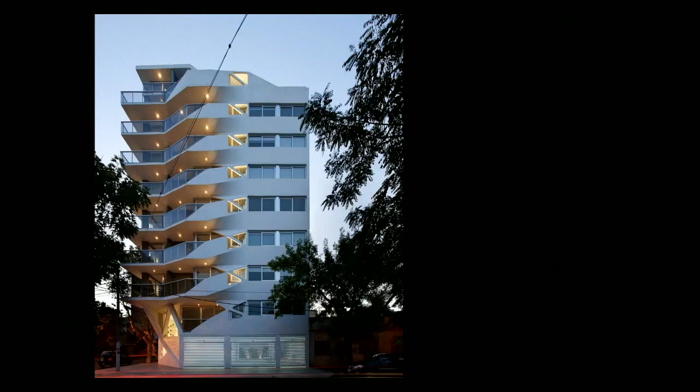Patterns for us has always been an inspiration, as it represents material form and geometry, but also social habits and human behavior. We always seek to integrate these ideas by turning everything that seems to be intangible qualities of life into somewhat of a physical presence.

We always wanted to work globally, to engage and learn from very different cultures, and after approximately 20 years of doing this, we have ended up building projects in different parts of the world. Probably, I don't know, maybe you might have seen a few of them.

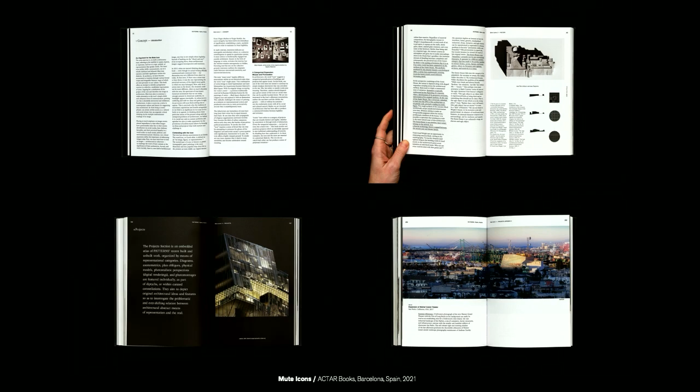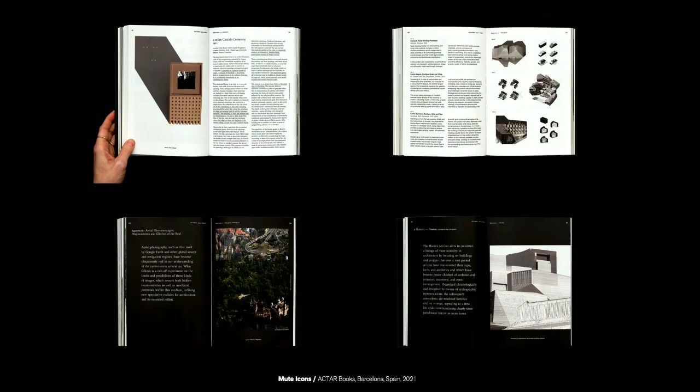Also, as Winka mentioned before, in 2021 we published Mute Icons, to position our view both in history and discipline, but also in practice and culture. The book is part atlas, part manifesto, and also part monograph, but most importantly it was the first draft of a new line of research in our practice that started to explore ideas of context. In the book, we analyze both historical precedents and our own projects, looking to develop a language and sensibility for discovering parallel, sometimes contradictory, and even unexpected readings of images in architecture.

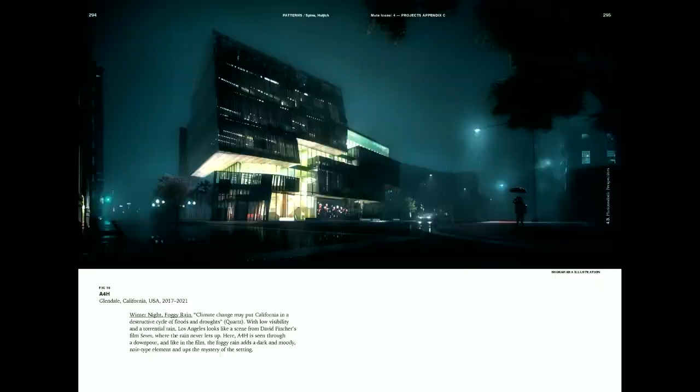In fact, for all this abstraction, for all the reductionism and even formalism of Mute Icons, context was always implicit in the work, however historic, generic, banal, pragmatic, or surreal, either as an image or as a narrative.

And in fact, when arguing about Mute Icons, we use Black Square by Kazimir Malevich as an example. For all its radical abstraction and reductionism, often described as the zero point of art, when Malevich first exhibited the painting, he hung it in the corner of the room, the so-called beautiful corner.

That means the place reserved in Russian Orthodox homes for religious sites and icons. That single gesture, we will argue, transformed the painting's meaning. The abstraction didn't lose its power, but gained new resonance through a cultural context, becoming at once sacred, symbolic, and truly disruptive, or to paraphrase ourselves, an icon that is unambiguously mute.

So to cut to the chase and use an example that everyone knows, the pavilion outside called League of Shadows, we want to argue that even the most reductive, abstract, or autonomous form never exists in isolation. Context, whether cultural, urban, material, or environmental in this case, does not diminish originality but amplifies it.

Beyond abstraction, Malevich's lesson is clear. When you have a corner, use it. Place the object in the corner, minimize its footprint, orient it to cast shadow and provide comfort, create a recognizable outline, mute outside, welcoming inside, and maybe create a useful landmark.

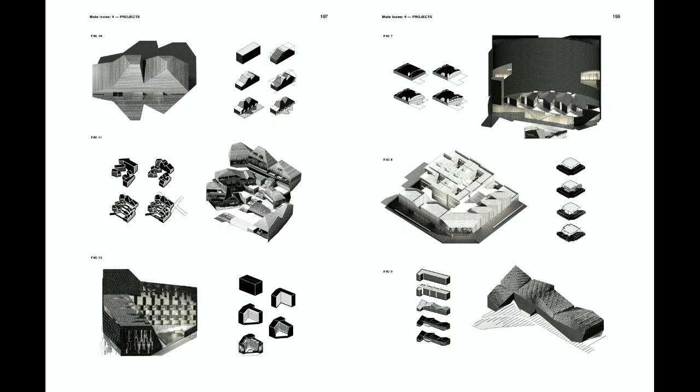But context is also family and lineage, in this case of our own work. Certain tropes are always there and always changing. And you'll be the judge, of course.

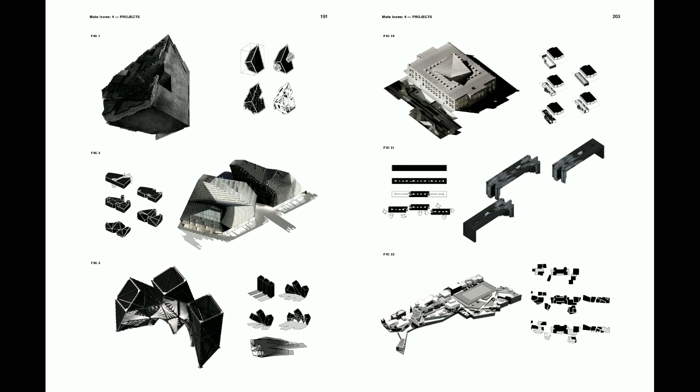And even though we don't think of process as ever this reductive, we're always trying to clarify and communicate our works to different audiences and also the public. So while there's always a layer of autonomy in what we do, context is also narrative.

We like collections and taxonomies, but the world and architecture is far more complicated. Context is a collective construct.

So context is always political. They describe their work as collecting different points of view to get closer to the truth, and they use the term aggregating perspectives. We found that phrase especially powerful. We think of context as a way of aggregating perspectives on our own work.

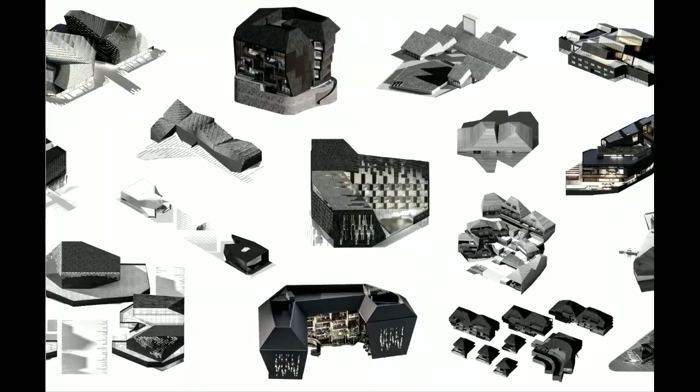We don't seek the truth, and we're not afraid of formalism either. But for us, form has an expanded role in architecture and culture and must evolve and change.

Across diverse sites and projects, we've developed an attitude and a language that is flexible enough to absorb and transform the specificities of context, sometimes hybridizing with vernacular forms or local materials, colliding with urban circumstance, or at other times generating new context altogether. So this is not architecture without architects, not a simple contextualism, but architecture after context. Authored, deliberate, and original, because it negotiates with and transforms directly what exists.

So 'after context,' which is also the tentative working title of our next book, suggests both architecture in the pursuit of context, but also architecture beyond context. And it is in that vein that we would like to present and discuss some of our work tonight.

We organize the lecture in themes according to context, of course. There's a lot of layering and density and specificity in what we will show, which we hope is not just a kind of pure imagery, but conveys our attitude towards the subject matter.

So we'd like to start in Los Angeles, actually San Fernando Valley to be precise. For all the tradition of the urban fabric of Los Angeles, it is increasingly populated with an existing building stock: banal strip malls, generic warehouses, sprawling and never-ending urbanism of stuff.

Here, context is reuse. This is Victory Wellness Center, an adaptive reuse project in North Hollywood that Winka was talking about. We did this in collaboration with Jose Rasti, who's the architect of record and is here in the audience, Matt Melnick, who helped us with structure, and Tina Chi for landscape, among a number of other collaborators, for around 7 years, so kind of insane.

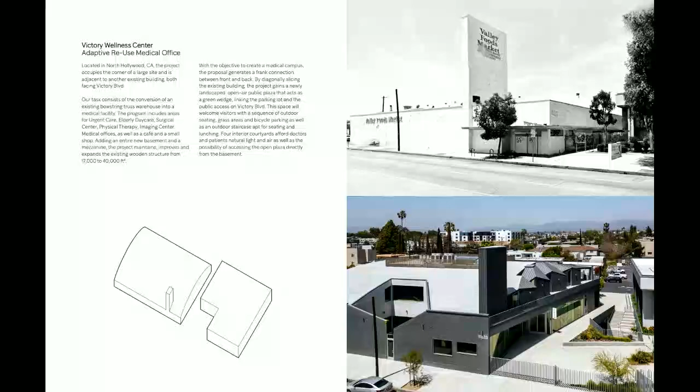We focus on the bowstring truss building, a pretty amazing space with 147 feet of span. This diagram shows our subtractive and additive approach to the shape of the building and to creating a campus: demolish 2 bays of the building to create space from front and back, and continuity, carved courtyards to bring light into the basement, new articulated facade to the open plaza, as you can see. Then sort of before and after.

You can see here how narrow the space between the 2 buildings is, barely 6 feet. This is what happens right now, where there's 2 things we didn't really touch, we only painted the building on the right. The space in between becomes much more organic and ample and generous, and also creates a kind of promenade towards Victory.

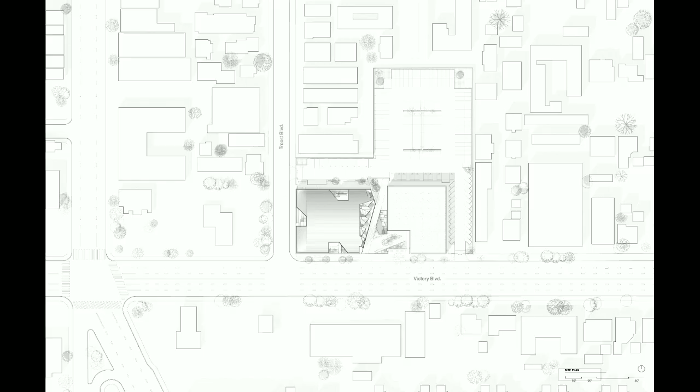In the location plan, you could also see the size of the building relative to the context, especially the residential areas on the north. We thought it was important to break the scale of the building without destroying its character, and this is one of the things that we usually try to do.

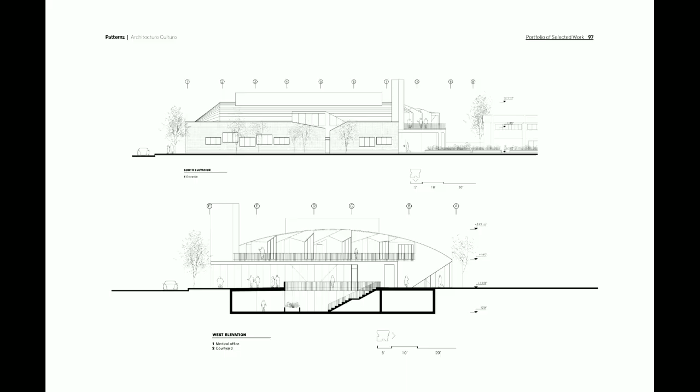So the courtyard cuts, as well as the crystalline extensions, bring a kind of smaller, almost residential scale to the overall mass, but do so while maintaining the legibility of the roof. We didn't want to just add stuff that would disrupt its nature. We wanted to read this within the unifying silhouette of the existing. That means we wanted to really have it both ways, to make the cake and eat it as well.

In section, you can see a form of subterranean urbanism, paraphrasing Mimi Zeiger as she described it in an article about the project. Of course, there's a sustainability aspect, but I'm not going to explain this here.

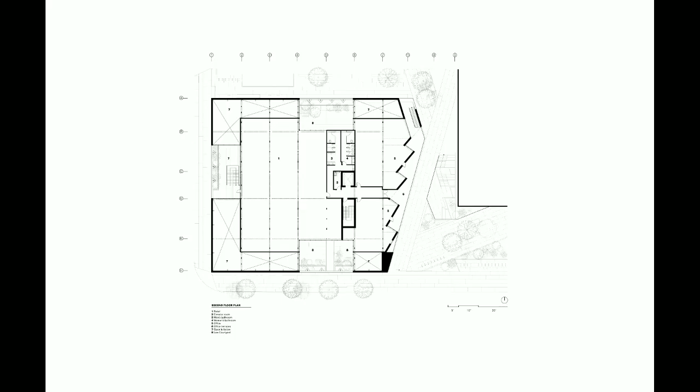Plans are quite packed and labyrinthine. I'm not going to talk much about it, but it includes elderly care, urgent care, as well as spaces for physical and psychological therapy, and yoga studios.

The challenge of this project was how to reshape this existing building by making it both useful and meaningful. We used glass and corrugated metal in the new facade, and painted the existing brick gray to sort of unify it all anew.

The courtyards, which are the real stars of the project, introduce depth into the facade through diagonal cuts, which add a kind of figural presence from outside. These cuts introduce depth in the otherwise opaque, sided building, creating a different presence on the street—mute but also engaging.

So the courtyards are the heart of the building. They are the excavated moments where the full sectional stratification and spatiality can be lived and experienced, and also where communal life will take place—something we had to explain to the users, because they were not quite familiar with that form of healthcare.

We're also creating planters to create a cascading effect inside the spaces, bringing texture and breaking down the scale. Also in the courtyard, you can perceive the layering of existing brick, steel shoring, retaining walls, planters and vegetation, all bringing the scale down from the ground all the way to what's actually a basement.

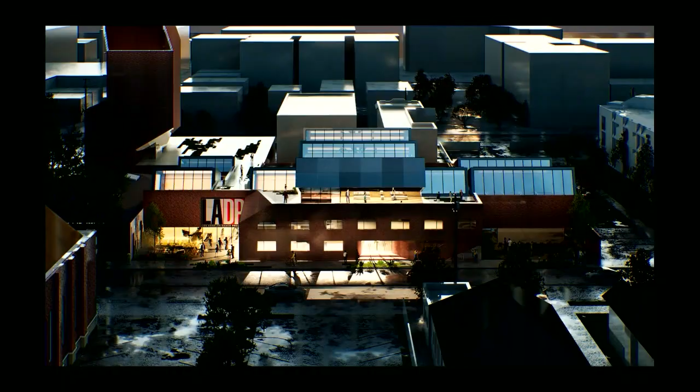So we propose maintaining the character of the front brick volumes by shaping and integrating them, while at the same time providing open space towards the street. We had to create a new interior, but for us, that meant creating a new roof volume that reimagines the old warehouse corrugated roof into a series of oblique rotating masses. The new image advertises the presence of something different, something perhaps more civic, maybe a bit strange, but still with a very familiar character.

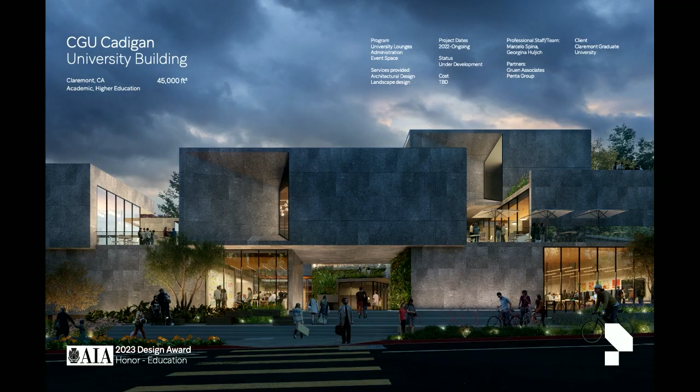The same character provides for an interior and exterior relationship. Here, the needs and magic of dance and choreography connect with the human need for natural light, mystery, and imagination. And context is always climate. Of course, here in Southern California, context is heat.

Cadigan is a building for Claremont Graduate University that integrates principles of comfort and ecology into an organizational and formal framework, perhaps a kind of collaborative ecosystem. The project involves a series of discrete and overlapping volumes around a fully open courtyard space that creates a porosity allowing the building to integrate with the campus and its surroundings.

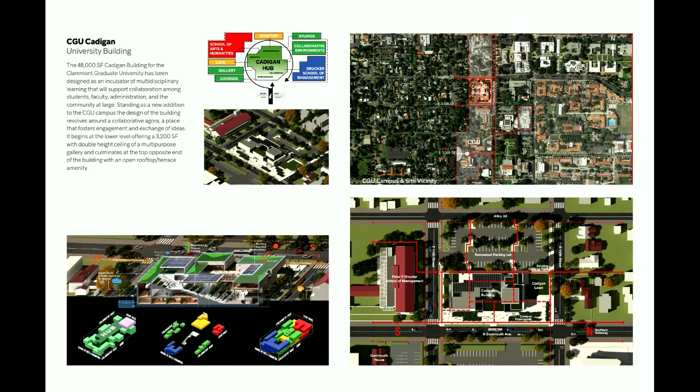The interior space is what we call a cascading agora, and it became a true space for collaboration. As the university asked for a gold LEED building, we proposed that all circulations and corridors be outdoor, using overhangs, shade, shadow, depth, and orientation to create a livable and comfortable environment.

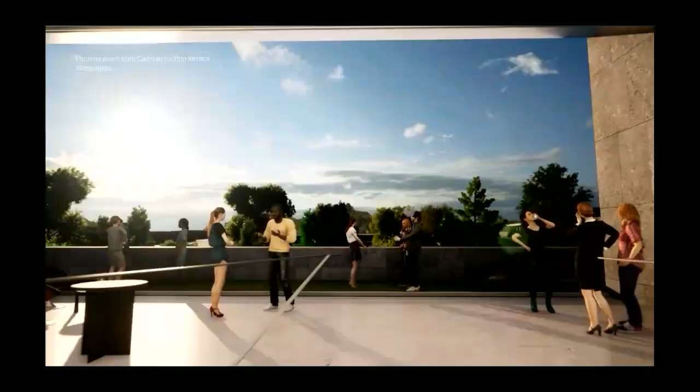Of course, we wanted to make a sustainable building—everybody wants that—but we also wanted users to commit to it. Sustainability requires human commitment, and that could be a bit uncomfortable sometimes. But luckily, Buro Happold made sure this could work, and the client was convinced, so we could proceed with the same scheme.

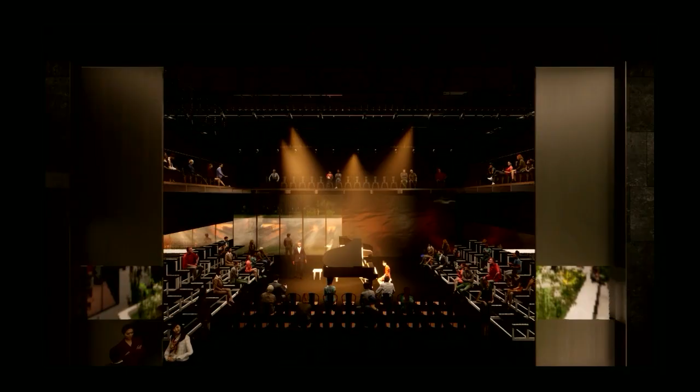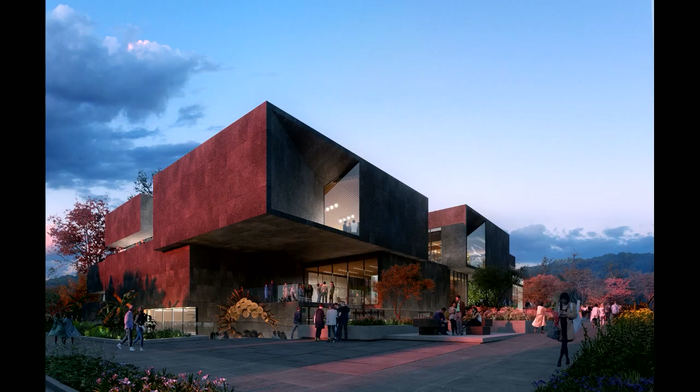So the Agora is, in fact, an amphitheater with an exhibition space that can transform into a stage for an open proscenium theater. In this case, context is also transformation. On the exterior, the stacking and overhanging masses are clad in black granite, expressing an institutional and maybe a bit brutal character.

Perhaps even a landmark, but one that is lively, human-centric, and ecologically and physically inspiring. Context is also media, or even popular culture. Here we are still in LA, but this time in West Hollywood, which is probably the most cliché, but also the most recognized part of the city.

Like Times Square, or going into what Times Square is, West Hollywood is dominated by the culture of the image, as you all know. Advertisement is absolutely everything and takes precedent over architecture. How to integrate art, advertisement, and architecture is the subject of a competition program from the city of West Hollywood that most of you are aware of.

We were lucky enough to win two of them and be commissioned a third, with each project exemplifying our consistent yet very diverse approach to the same problem.

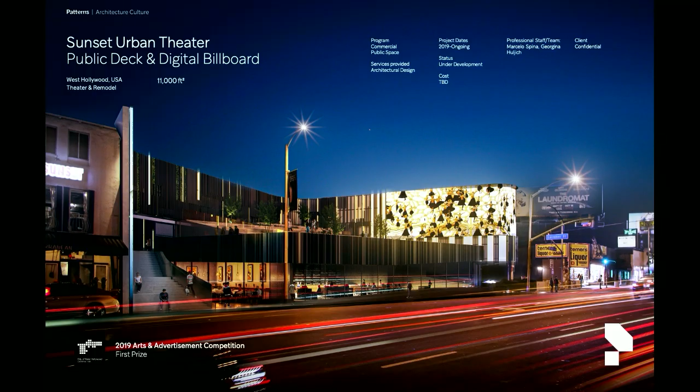The first one is Sunset Urban Theater. This is our winning entry for the very first competition the city held in 2019. We propose a publicly accessible terrace deck—why not call it an urban stage—at the top of the existing building, surrounded by digital media, lighting, a modulated facade, and some landscape.

The existing building holds a Chase Bank, which was recently renovated. It's not a bad building, but it wasn't ours either. Nevertheless, some of its features, specifically the curving corner, became an asset we could definitely work with. As architects, unfortunately, we don't get to choose context—we can't say, 'Can I choose another site, please?' We cannot do that, but we were still able to work with it.

You see the before and the after, both the strange resemblance and at the same time, the important differences between the two. So the project proposes a meandering media wall with a curving sign at the corner. This wall wraps and zigzags, surrounding and modulating the entire observation deck, or the urban theater as we call it, and then falls down to the sidewalk where a public stair is placed.

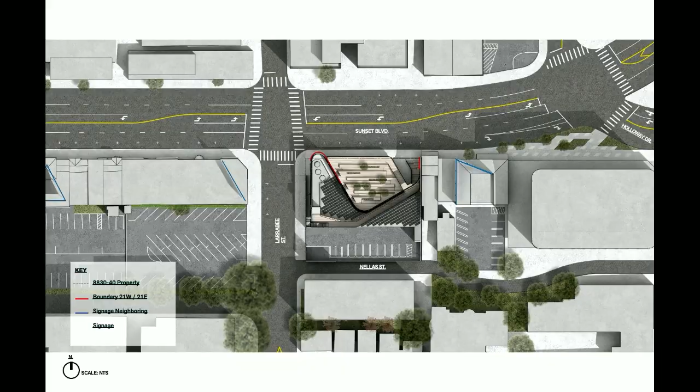So in the site plan, you can see how the theater is facing Sunset Strip but also bends to look towards the east. In this way, it can bring the urbanism of the context and the extensive views back into the project. Ultimately, we didn't want to create just an object, but a contemporary public stage, a radical civic proposal, and a space that doesn't really exist anywhere else on the Strip.

Unfortunately, despite winning and the project actually becoming a poster child for the city's civic ambitions, this project won't happen. So sometimes context is inaction or even stupidity.

The second proposal is Wonderwall, one of the winners of the second competition, considered a gateway sign. Our colleagues Florencia, Andrew, Hitoshi, along with Craig and Min, who completed theirs recently, also have a project nearby, so we're really in good company.

This site is where West Hollywood transitions into Beverly Hills, hence the Gateway denomination. It's a quite remarkable and consolidated urban site. The existing building is a recently renovated Gruen design from the 60s, a great example of corporate modernism which we not only appreciate secretly and not so secretly, but relate to, and also wanted to expand.

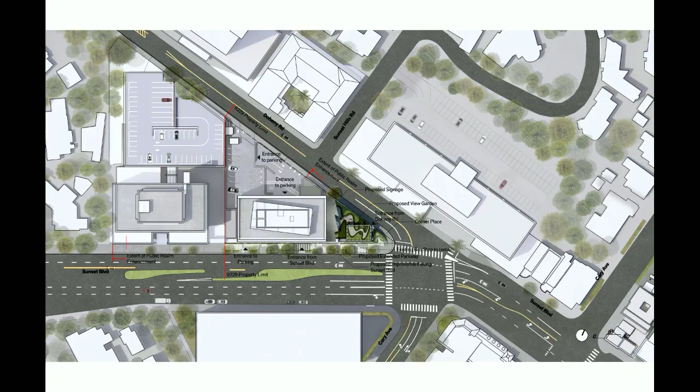Our project aims to do two fundamental things. First, to operate at the scale of the building by taking over the entire facade. Second, to break the sign into 3 parts, so that each part in a rotational mode can face the direction of the Strip right before the bend, where you have about a mile and a half or 2 miles of straight vision.

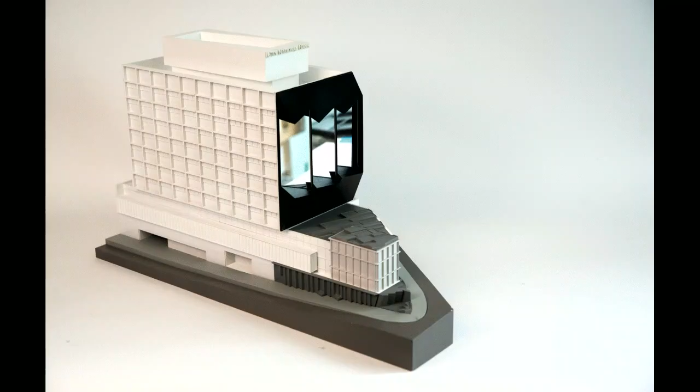So the rhythm of the advertising images will shift from flat and continuous as you approach from far away, to serrated and 3-dimensional as one moves closer and passes it. We studied different versions of how to modulate these 3 vertical columns - you see some models here. We do models, not a lot, but some, to see how they will read not just architecturally, but urbanistically.

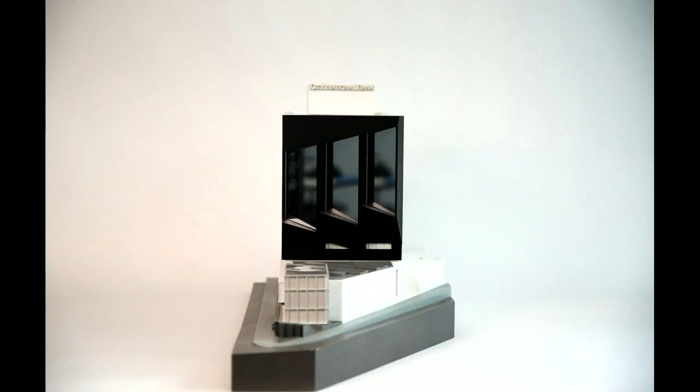This required meetings with the city, who argued that their preferred scheme pointed drivers - urbanistically - in the direction of Doheny Drive instead of Sunset, as if drivers will take a direction just because of the sign. This never really occurred to us, but we of course accept it and move on.

So context, of course, unfortunately is compromised. The sign will be clad in white aluminum to match and integrate with the existing building. Even though the model was black, we shifted to white because it was better. We'll use solid and perforated panels as well as LED sticks.

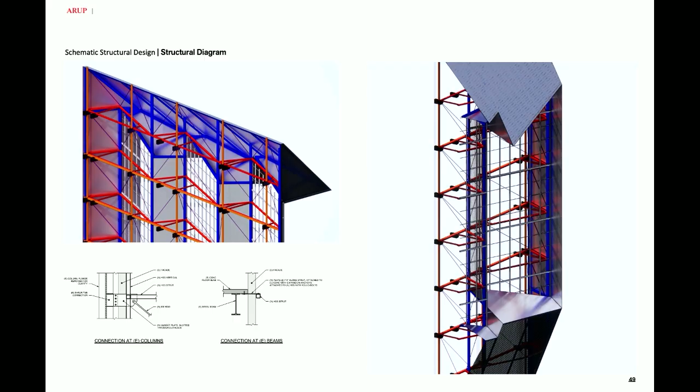So the elevation of the existing building will be see-through, and the billboard will operate as a kind of digital rain screen. The new sign really kind of skews the building, giving it depth, shape, and light. We're working with Ove Arup to hang the new facade, to make it lightweight and hang it on the existing building so we don't have to bring columns or anything outside.

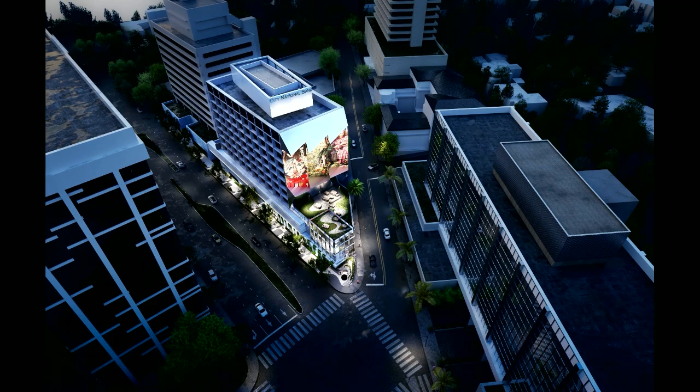So our idea was not really to make a crazy object on top of a building - it's not a parasite, but to reshape a building to look in a different way, maybe like a split personality. To be a gateway and a landmark, our proposal included spaces that are either inaccessible, like this rooftop garden in the corner - think of some of the taller buildings there and their views - or accessible, such as the sidewalk along the Strip, improving the overall human experience of the site.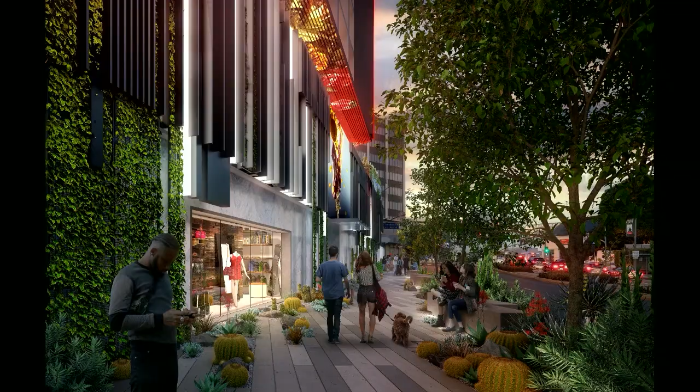So we're working with SWA for landscape, creating a small park in the corner of the bank, which is one of the oldest in West Hollywood, which will allow users to interact physically and digitally with the site and the history of finance. This is a bit of a narrative that the city required, but most importantly, we really thought about this Wonderwall as this sort of space of wonder, a magic facade that would transform an existing building and give it a new life and a different aesthetic.

Finally, this is Gill Pixel Turner. It's a smaller but equally challenging project at the corner of Sunset and Doheny Drive. Context is history and also preservation, especially here. Whether or not it has architectural value to us architects, if it has value to a community, then we must engage it, critically, of course. I mean, that's what we think.

This is the existing 1923 Spanish Revival building we're working with on this project. The building is considered a historic cultural resource in the city of West Hollywood, and it must be preserved and enhanced as part of our proposal.

We never done anything like this. For reference only, we didn't win this competition. There was another project before us that won. It was called Cell in Hand. We're obviously not doing anything like that, but this is also context.

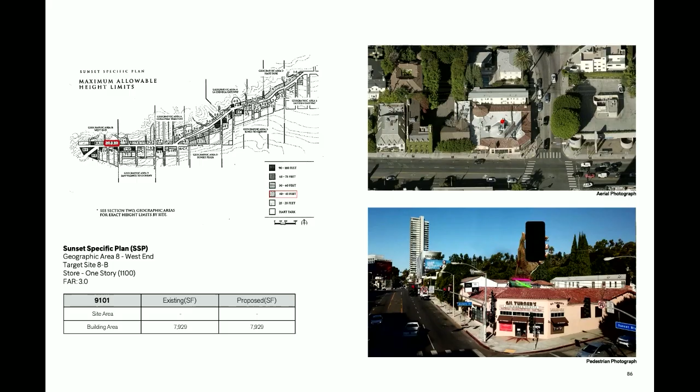The challenge in this project is really how to add to the existing, maintaining a level of compatibility and contrast between old and new. These are actually words that don't come from us, but from our historic preservation consultant, which we need in order to make this project a reality.

Early on, we devised a controlled stacking and piling of primitive masses and placed them right at the corner. Our intuition in this never really changed. When you have a corner, you must take it, and this was an important one.

At the same time, we also calibrated the forms and volumes with the lines of the existing red tile roof. The intention was to create somewhat of a symbiosis between old and new.

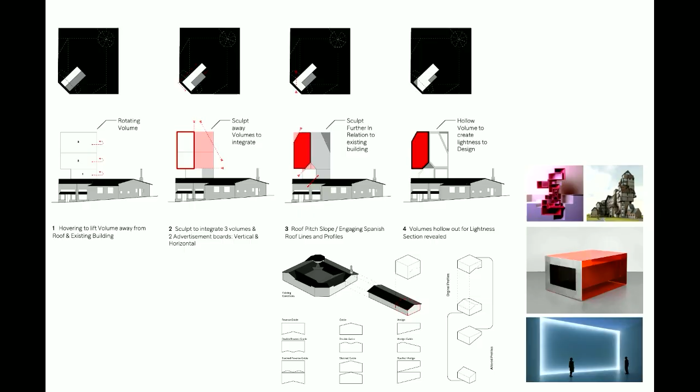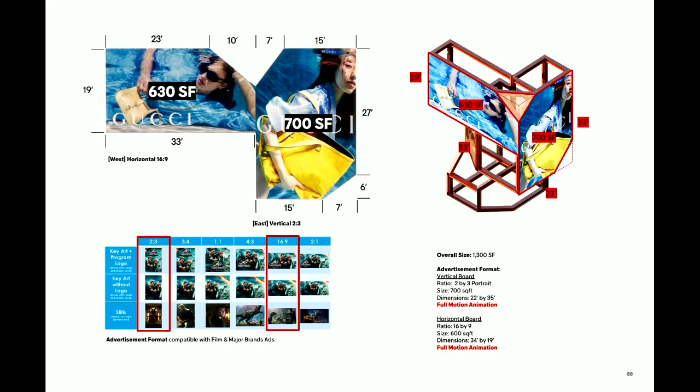The sign itself is pretty simple. It's a two-sided object that addresses the two main directions of the site, with also the most compatible advertisement formats. Vertical portrait celebrates and reinforces the corner, and a horizontal format addresses western views. The intention was to create a shape-shifting composition with radically distinct readings depending on the approach: a pile from Sunset, a vertical totem from the corner, and a hollow character from Doheny. At least, so we're hoping.

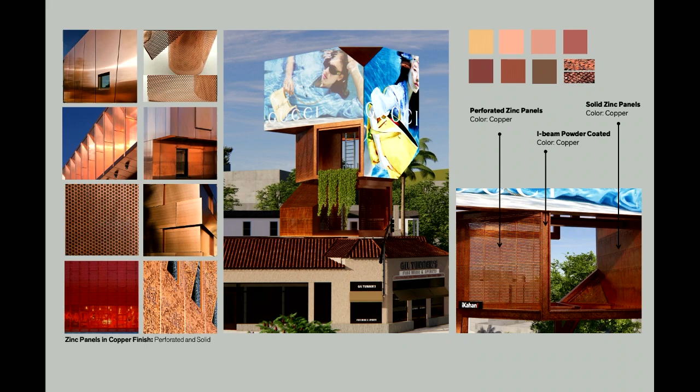For material, and this is a big part of our problem with context, we also consider these two things: compatibility and contrast. Drawing from the color of the weathered roof tiles, we settled on a copper finish, perforated and solid zinc, and at least this is the kind of project as of now.

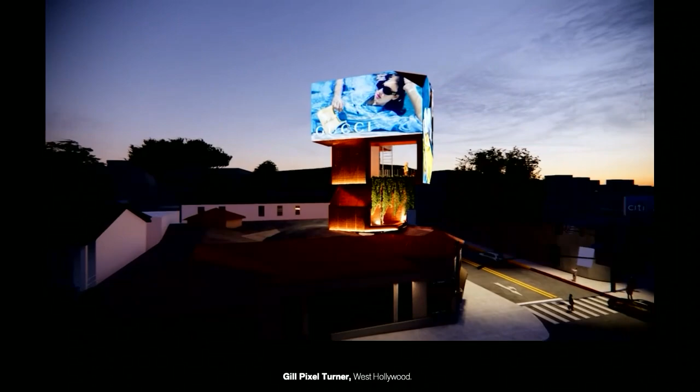Viollet-le-Duc advocated for an imaginative restoration, a form of preservation that involved adding elements and turning buildings not back to the accurate historical form, but to an imagined originality. This was a polemic argument, of course, but it is a little bit in our mind when thinking about preservation in this case. Think of the sign as a corner marker, not just as an object, but also enhancing the existing composition.

So context is also heritage. Here we are, in this case in Saudi Arabia, where the project takes on the Qaṣr al-Farīd tomb, also known as the Lonely Castle. By the way, this piece is in the back of our book, even before Winka saw the cover, it was already there. It is truly an icon, and it is very close to our heart and mind.

And the project engages with the problem of over-tourism and the preservation of monuments and ruins, and how architecture can proactively protect and elevate their continued experience for all the generations to come.

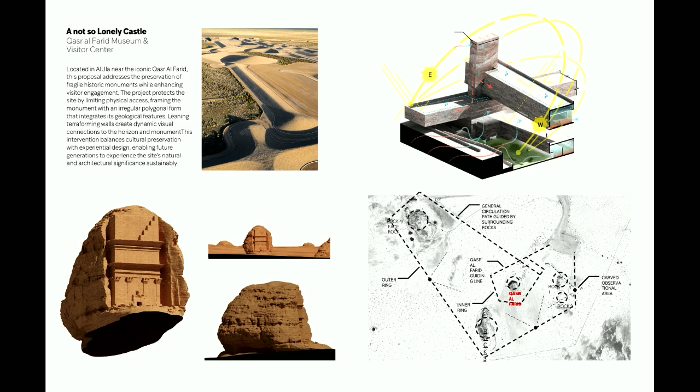So we propose a radical expansion of grounds around the site, including a museum, a visitor center, and also some research programs. To protect the cultural monument, we literally limited public accessibility to it, and at the same time, we were able to maximize its visual experience.

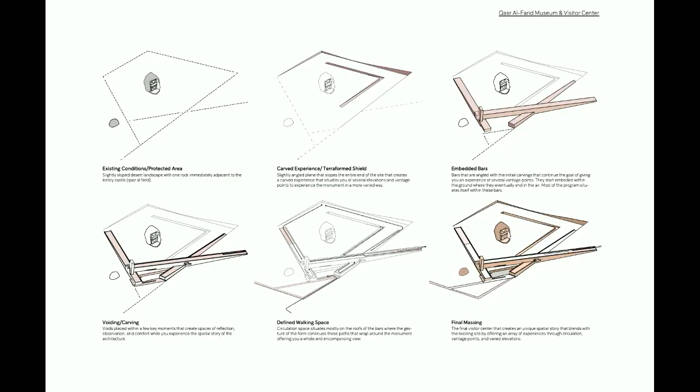So the building surrounds the monument with a polygonal shape. Very, very long and leaning terraforming walls allow for an ever-changing relationship to the horizon, to the ground, and to the object without visitors ever getting too close to it. Ultimately, the new building acts as a mound or maybe a landform that offers a contrasting datum to the irregular shape of these absolutely beautiful geologic boulders and their architecture.

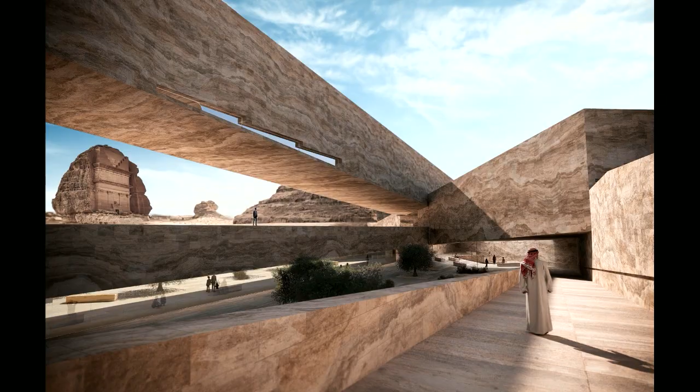When walking around, some walls project the original historical inscriptions of the monument, now transcribed into the monolithic granite mass. Other walls guide visitors descending into the ground while framing the monument in the background. This also creates a space for resting, away from the desert heat and the sun.

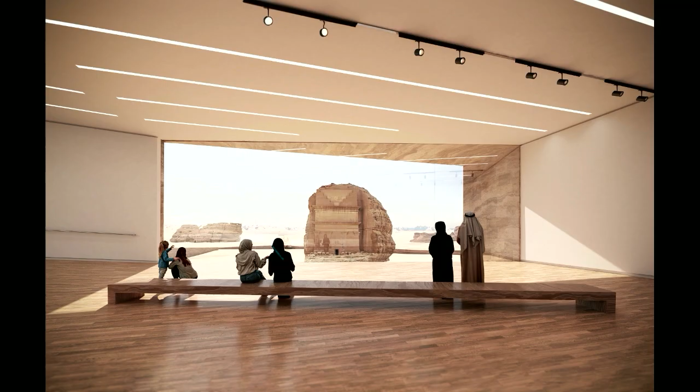Ultimately, the project operates as an instrument for framing history and conserving heritage, both conceptually and organizationally, but also formally and, why not, experientially.

Context is also conformity to local traditions and to the vernacular. We are lucky to work in some very remote and highly prescriptive vernacular settings, in this case Indonesia, particularly Bali, where the work is not just about design but about engaging with local traditions and building practices, very different from the ones we were familiar with.

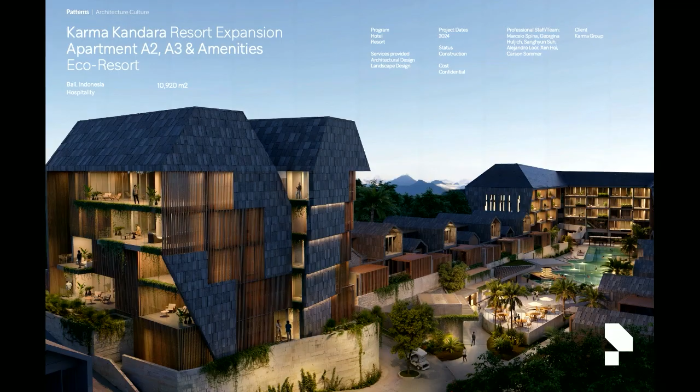I'll walk you through two projects we are doing with a Singapore/Australia-based hospitality company called Karma Group. I bring this up because you'll see that name in almost all the slides, given how many projects we've done with them. Our collaboration has spanned a number of years, developing a series of projects mainly in Europe and the South Pacific.

The first project is the last phase of a large resort development, located at the very southern tip of Bali, facing the Indian Ocean. The existing resort consists of a collection of villas and usual amenities, organized along a creek that connects the back of the site to the beach.

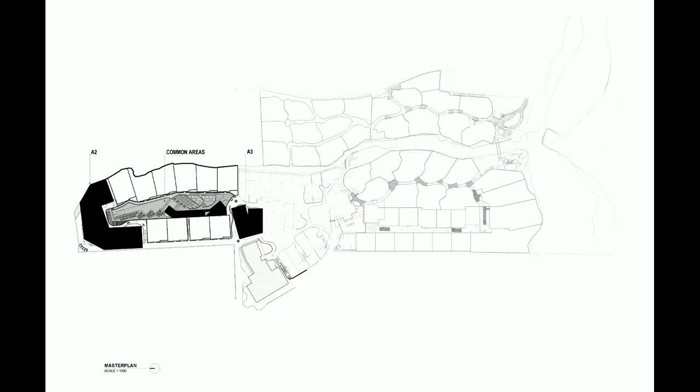The new phase, phase 6, will add two new buildings and common grounds for the entire resort. Our site is located at the very back of the property with no direct access or views to the ocean. What might have seemed a limitation actually turned into a productive constraint that pushed us to design buildings that had to look inward, toward the shared amenities and toward one another.

Our proposal generates a form of tropical micro-urbanism: two buildings at opposite ends create strong beacons, with a meandering pool space generating a promenade. Imagine a Piazza Navona with water, or perhaps underwater. We use volcanic stone that has long been used in Hindu temples, which gave the work structural weight and, most importantly, cultural character.

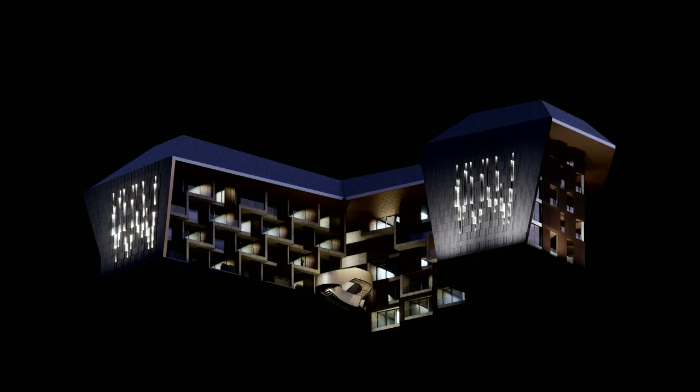This stone is widely used around the island. It's very affordable, cheap, robust, and very black. It was really a dream for an architect, or at least for us, to work with it.

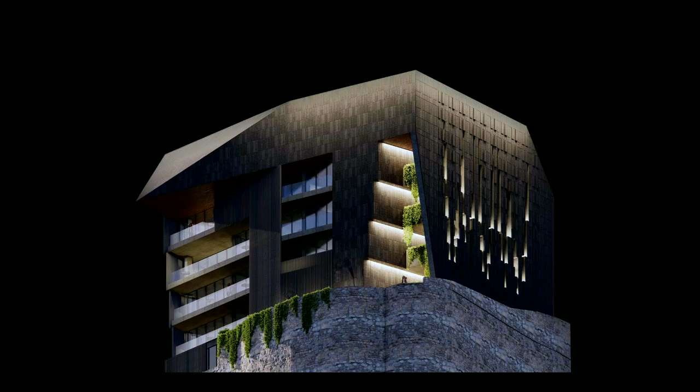The courtyard building, the U-shaped building, creates a playful stepping on the balconies, generating a pattern that prevents it from being too monotonous. The cube one, the little brother, allows more play on the mass and has a split roof that defines a very different character.

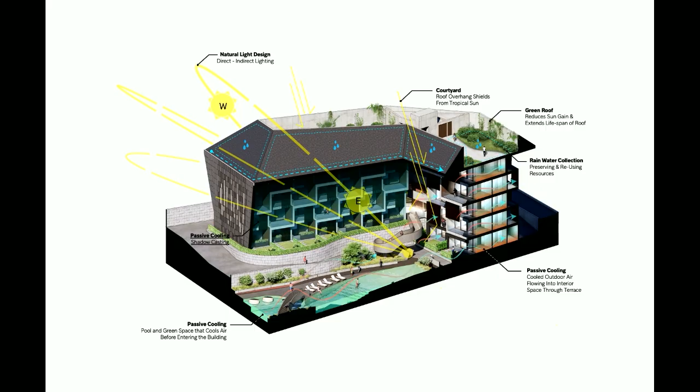Both buildings use a base of local limestone consistent with what already exists in the resort. The rainy season in Bali is brutal, so the overhangs—almost 4 meters on the front and around 3 meters on the back—protect against direct showers. Taking advantage of the roof shape, we could allocate mechanical equipment on the rooftop, leaving a clear central area for greenery and common amenities.

This plan shows the relationship between the two buildings, the pool, the common spaces, and the surrounding villas. The larger building to the left has a mass configuration of an open courtyard that reinforces a sense of interiority and intensifies perspectives from and toward the common areas. There is a clear idea of a front and a back.

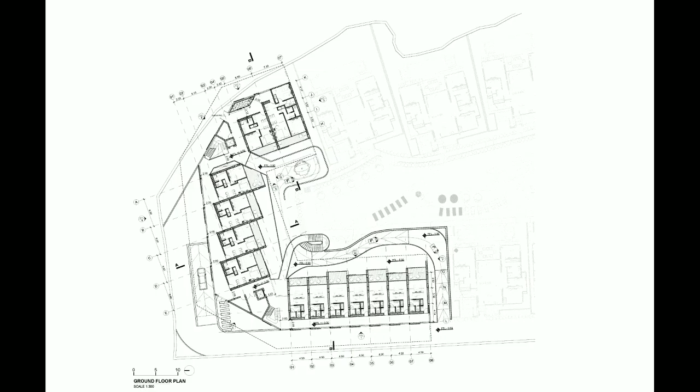Instead, the smaller building to the right stands freely with views all around. It operates more as a landmark and perhaps a transition to the front of the resort. Units are laid out to maximize views toward the common space, and access to the building happens at the two elbows of the U-shape.

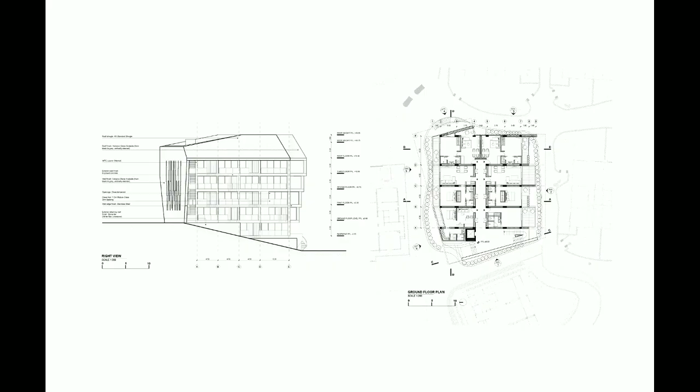The sections are pretty straightforward, as they need to be, sometimes when operating on a hospitality typology, but actually the smaller building takes advantage of its more unique character, both in terms of its position within the larger complex, but also its smaller scale, and offers 4 very distinct elevations and different layouts of units on every floor.

Definitely, this building is much nicer in elevation. The other one is maybe nicer or more attractive in plan. And I guess, I mean, this happens, you know.

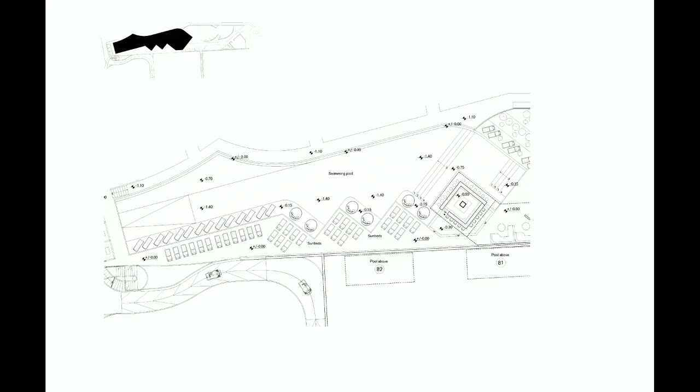So lastly, the common areas are organized around a very large pool with a swim-up bar, a beach, a cellar, and a restaurant, everything else in between. It's a brief that repeats itself on every project we work with this company, so be ready for all that alcohol taking place in that.

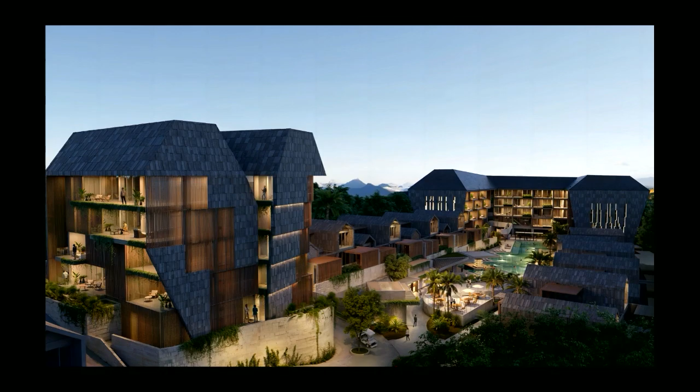Being away from the ocean, our idea was to generate a form of internal oasis. So buildings, pools, and transitional spaces, in a way, choreograph and stage almost theatrically the inner life of the resort. The pool and common areas act as a promenade, which added to the landscape and the vegetation creates a very vibrant environment.

So while we didn't design the villas or the original master plan, we convinced our client to unify materials in the new area of the resort. So basically we wrapped all the existing villas with the materials that we started working on for the new buildings.

The inner corner shows the access to the apartment with a concrete cast looping stair. As you get inside the buildings, outdoor lobby and vertical circulation areas become almost like accent zones that are clad in local brick as well as wood to create not only contrast, but also a micro-ecological experience, including some water features, volcanic rocks, and hanging gardens.

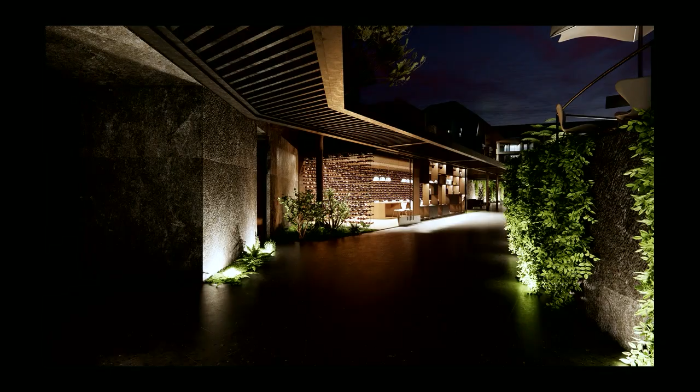A wine cellar near the pool. Here is a courtyard building that is bookending the composition as seen from the pool. The two side walls are articulate in nature.

I mean, not just because we wanted, of course we wanted it that way, but also to satisfy the need for Hindu ornamentation that is required by local code. So the interior is both transparent, but also offers degrees of privacy through the articulation of different types of wood patterns.

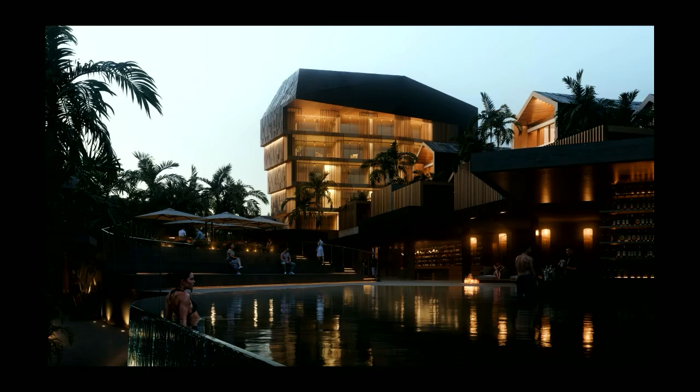Different from the oceanfront villas, this area of the resort is way denser, and we thought it was important to articulate not only all the building masses and facades, but also the necessary transitions on all the common areas, almost like a form of exotic urbanity in the jungle.

This view shows literally the stepping stage around the pool and the different materials and thresholds as they meet each other.

So this project is starting construction mid-January 2026. We're finally breaking ground after almost 6 years in the making. So yeah, we're very excited about that.

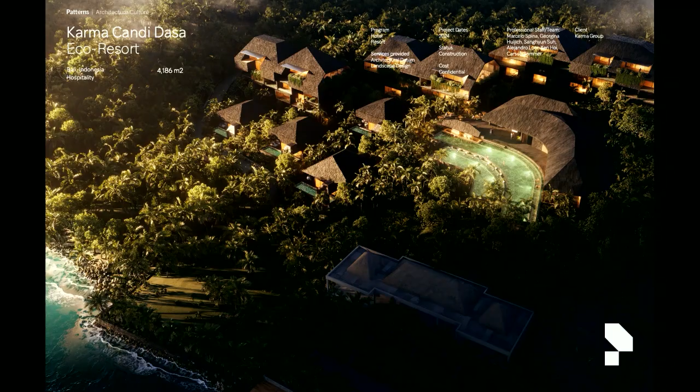So Karma Candi Dasa is another resort in Bali. We just started working on, same client, very similar project brief. Recurrent brief with all these swim-up bars and DJs.

It is a very similar typology as in the previous project, yet in this case, the project needs to adapt to a terraced landscape, and it needs to step down the hillside as units and amenities cascade down towards the ocean. So this project is located on the northern part of the island and just a little bit removed from the coastline.

Here, the roofs and hut forms are more broken down, creating a collective form. And they're pretty much tailored to individual units and separate masses that, in their outline, create a more symbiotic relationship with the surrounding landscape.

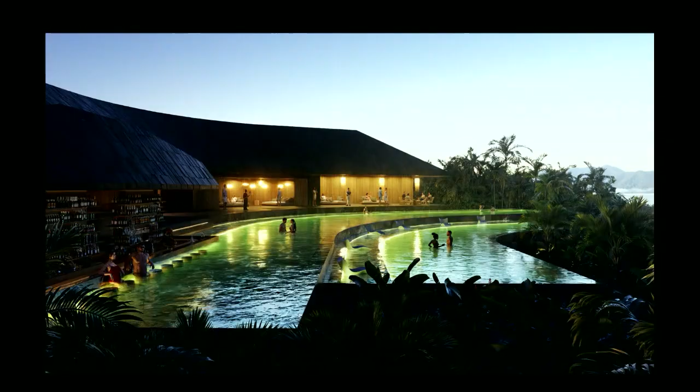Balconies open upwards, and also roof lines appear as sectional cuts, camouflaging with the background. Both masses and pools cascade down the hillside, and along with volcanic stone, we also were using tropical hardwoods that carried forward local craft traditions, while also offering some practical flexibility.

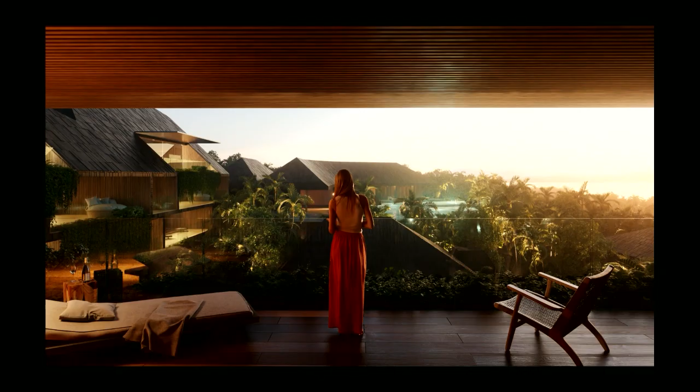We also were given the choice to work with bamboo. No questions about what our answer was. Luckily, they took it. And, well, the client's favorite, kind of marketing image. And the perhaps establishing shot, situating our strange huts with the other local huts.

Ultimately, working on these projects has pushed us to rethink our cultural ambitions through local knowledge, to try to find design solutions that are both responsive but also are rooted in place.

So context is also natural disasters, change and resiliency. Georgina runs the kind of White Lotus part of our office, and I get sort of down and dirty.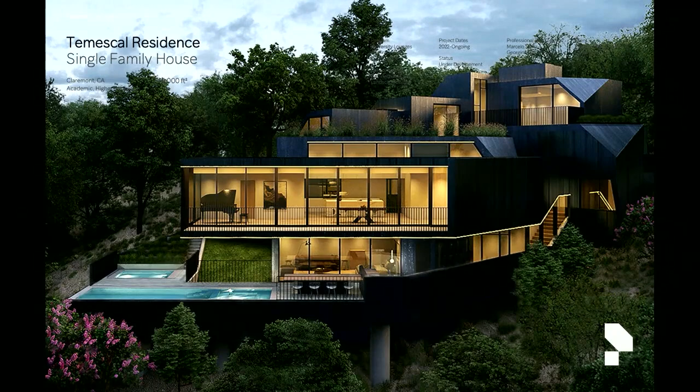Located on the Palisades and overlooking Temescal Canyon, this project began as a substantial remodel and addition to an existing mid-century home, now lost to the fire. Our design really aims to enhance and augment the site's unique features, which included a house, while overcoming the challenges imposed by coastal regulation, hillside context, and of course the continued fire hazard.

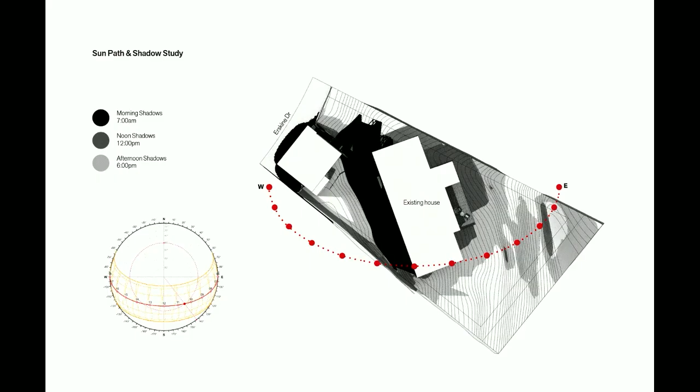It actually was so strange to see why it was there like that. But of course, this existing house followed the contour lines of the topography, which in this trapezoidal property made the bar to be positioned almost opposite to the ocean and completely separated from the street.

This is just to show some of the documents that end up shaping projects like this, and then in forms of constraints. Reusing what was there, the project kind of creates a new aggregate, that also gives the house a presence on the street. Interestingly enough, whether the house is there or not, of course, it's no longer there. The topography is still there, and just keeping that or maintaining certain fidelity to it was important.

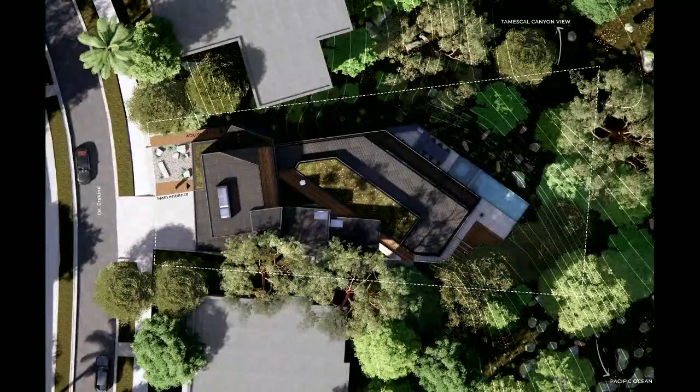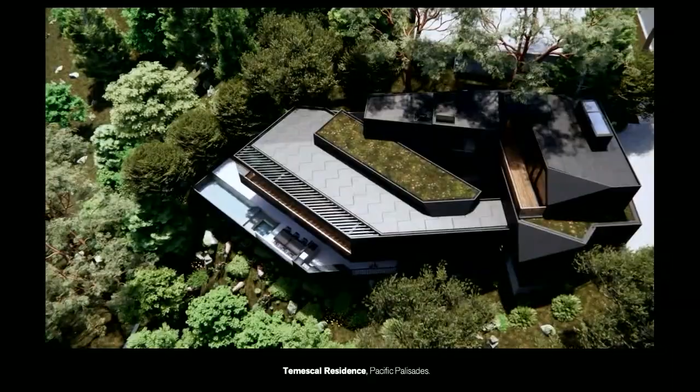So a substantial remodel added to these layers of bureaucracy of coastal development permit, which started in 2022, and now becomes a fully new house, which is still under permit. We have public hearing and so on. So what was a totally disconnected house from the hill now becomes this sort of new aggregate, integrated and maintaining some level of independence and interdependence, between each part and the whole.

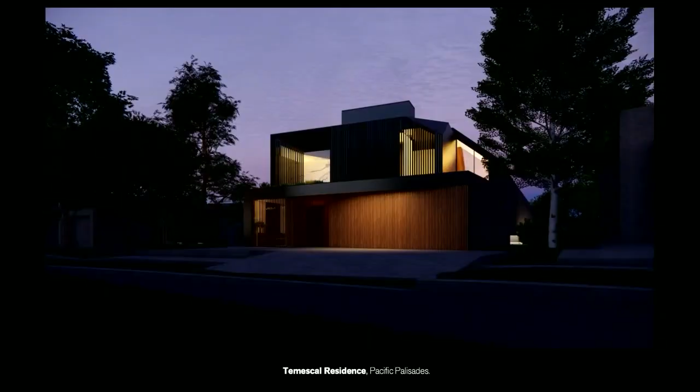At the street level, you have a sort of simple but mute but kind of engaging facade, and yet you have these kinds of volumes, in this case the bedroom volumes that are actually kind of stacking over what would have been the existing house, and yet creating a little bit of a courtyard in between.

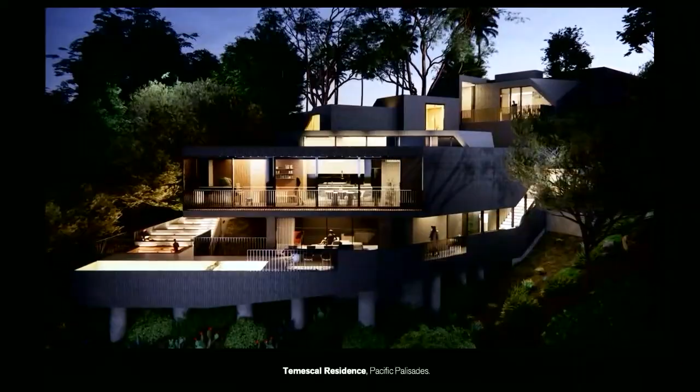So the new composition is both more grounded but also kind of unstable, following the hillside terrain with a cascading mass and also chiseled outlines.

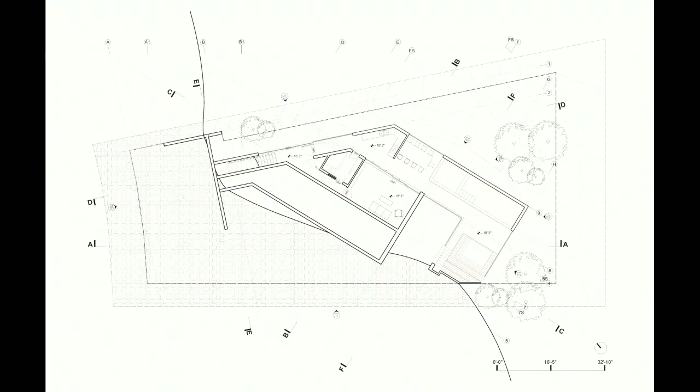The new house, we want to show drawings because we like drawings. Sometimes you wonder, but you run out of things to say. But the house has 4 levels, and it's organized around this courtyard.

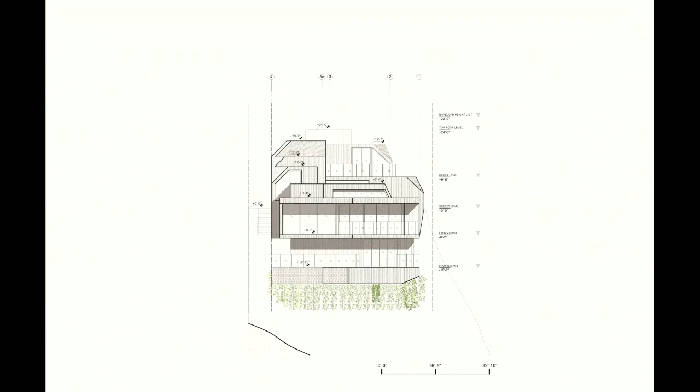So we will never say that actually shaped our project. We wanted it that way, but somehow you find some sort of alignments that help you make a point. Almost every level and every space is at a different level, allowing the mass again to maintain fidelity to the slope, which is something we needed to do anyways.

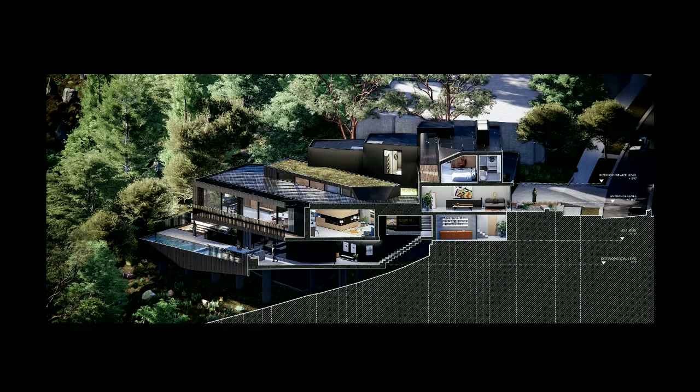And you can see the cascading effect over the courtyard in this kind of more colorful axonometric and isometric, and a little ADU in the front as well. The clients really wanted to maximize the space and to get something quite amazing.

So before the fire, we had agreed with the owners that the house will use charred timber wood in its facade to capture the forest spirit of the canyon and its lush vegetation. We had tried metal, they didn't like it, and we somehow, we thought this was actually a good idea. Of course, we had considered fireproofing before, and we consider it now with other fire suppression systems and so on. But we thought, and really thought this seriously, that the material will have a different connotation now after the fire.

Our clients, a very, very thoughtful filmmaker, thought that we should double down, and we had a very emotional discussion. They were not in agreement. They said the house and the material was beautiful, and its experience will be different once the context evolves. So change is not always the answer, and sometimes we need to ignore context.

So sometimes context is your own work. This is Casa AGA, a small addition to an existing house we had designed 10 years ago, where we had a very rare opportunity, not of a do-over, but of maybe doing it again and hopefully doing it better. The project is located in the outskirts of Rosario, Argentina, our hometown.

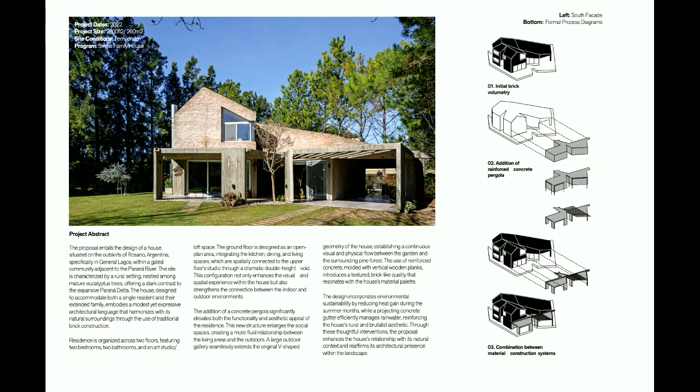But our proposal actually does more than just being a concrete pergola. It adds a new brutalist character to the house and creates a seamless relationship with nature and the outdoors. We basically extended the existing home to expand its social areas by enlarging the living room towards the outside, and we propose a large covered outdoor social space with a gallery allowing a fluid relationship between interior and exterior, as well as a more intimate connection to the garden.

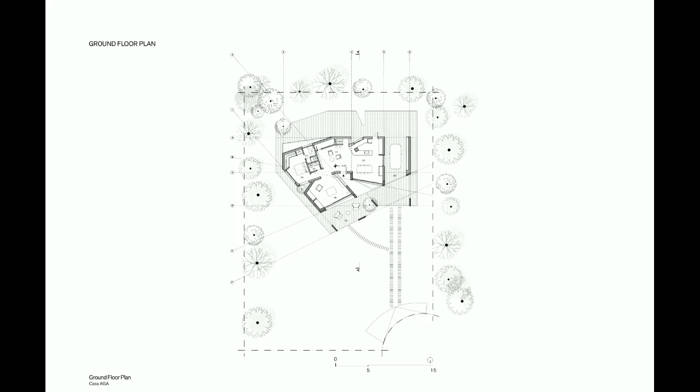You can see the very intricate geometry of the existing house and how it extends towards the concrete pergola. In the original house we used brick all around, but also on the roof, which is not that common. The new concrete pergola extends both in shape and geometry from the existing volume.

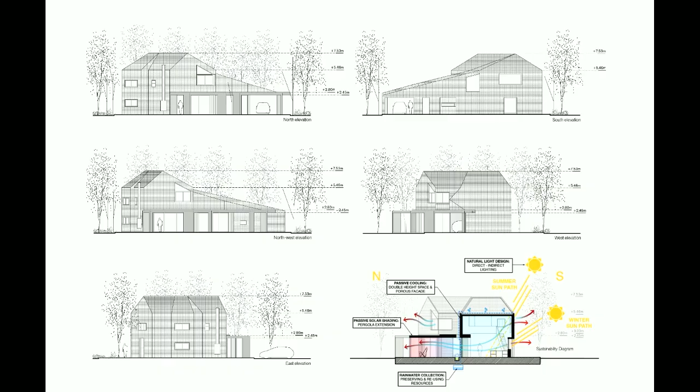The new concrete gallery creates shade and shadow, reducing heat gain in humid summers while also maintaining really beautiful natural light. This addition creates a very contrasting composition by integrating concrete and brick.

The new concrete veranda extends naturally from the forking geometry of the existing brick house, while also emphasizing and augmenting its original features. So the original V shape is emphasized, affording a more nuanced relationship with the garden, as well as a very different presence when approaching the house from the outside.

The new gallery is completely built using cast-in-place concrete, and to allow for a sense of privacy and openness from the inside, columns are long and thin, suggesting a sense of continuity between vertical and horizontal planes.

Similarly, these volumes were placed on different sides of each corner to frame exterior views as well as interior ones. Concrete surfaces were cast using wooden planks that were half the regular size. We were interested in emphasizing texture while also bringing the dimension of the brick into the concrete.

To cope with the very exuberant rain of Argentina, we created a concrete gutter that projects outside and becomes a very expressive feature which accentuates the rural character of the house.